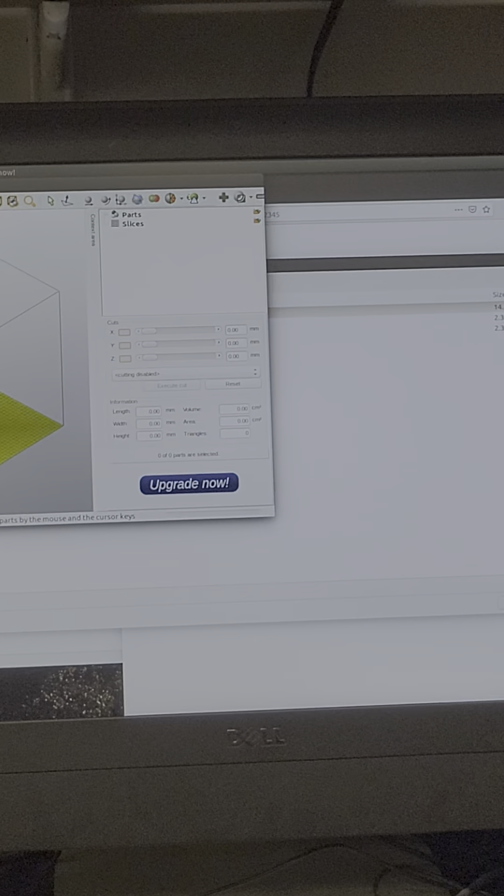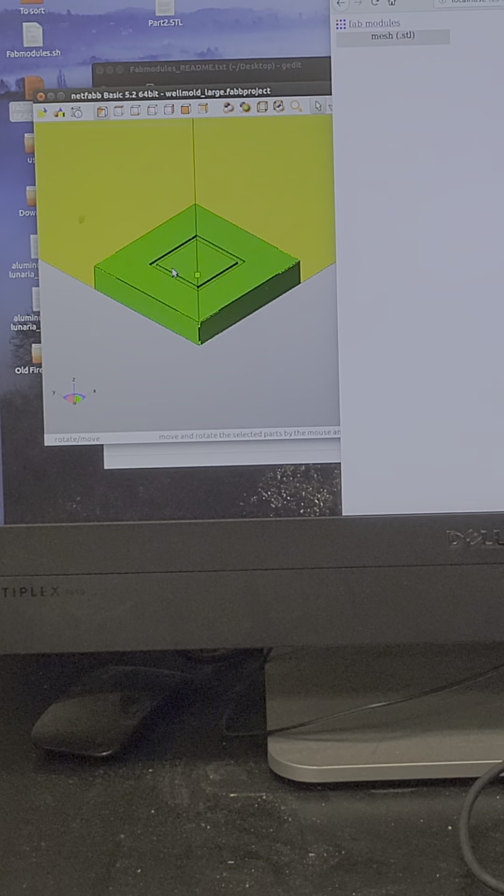Let's see if there's any software that we can look at what this guy actually looks like. So this is just a simple mold with just a square, or just a ring. But you need it to look at a file and see if there's any pattern in that file. So you need some sort of base platform for the software to read it.

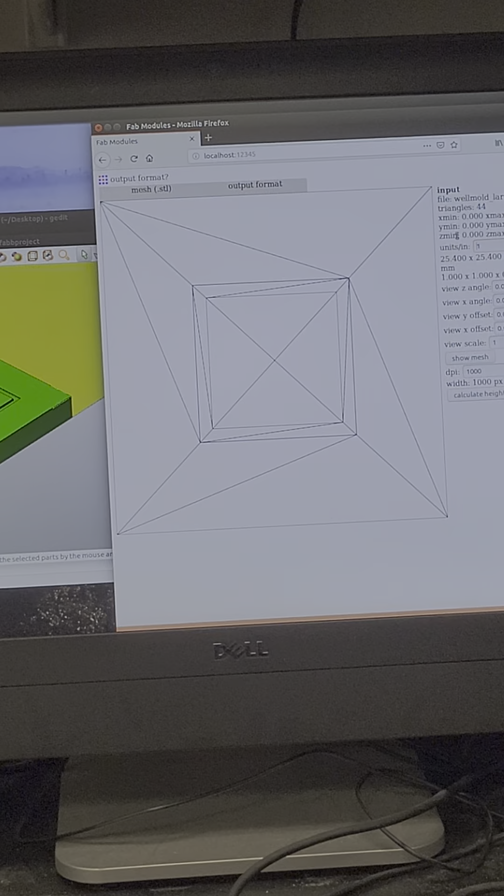So if we open that file, it's looking top down. So you have to make sure that the z-axis is pointed up on your file. Okay, so we're looking down, you can see this. And the only thing we have to change on this first section is the units per inch, depending on what units you used. I think I have millimeters, 25.4, and then you just hit calculate height map.

See it, kind of, it's yellow. Yep, yellow right there. Okay, well that's nice. So output format for this is Roland mill, the only output that will work here.

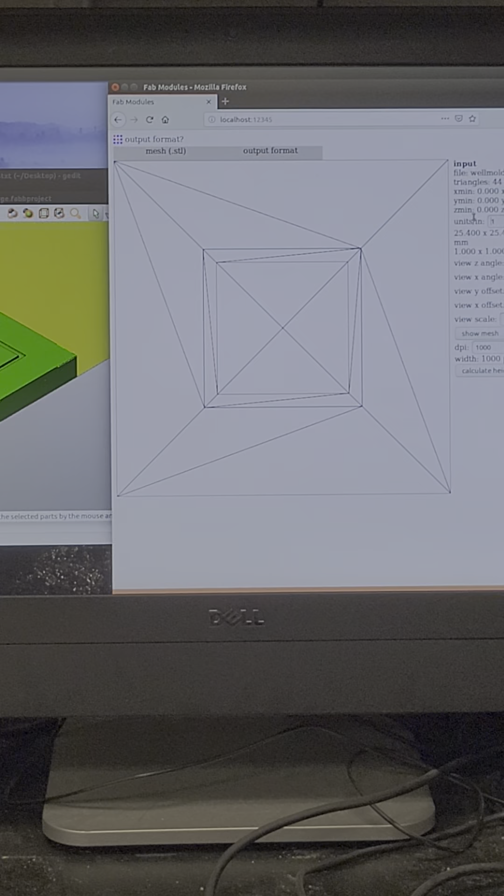Does the power need to be on or something, or? It's not happy. Okay, fun, haven't used this in a long time. So it's still connected to the computer, I assume, right? It's still connected to the computer, but the one other thing I can do, besides restarting the script, is run this command to allow you to connect to the USB, if that's the issue.

I'm just going to restart the script and see if that fixes it. So let's try this again. Mesh.

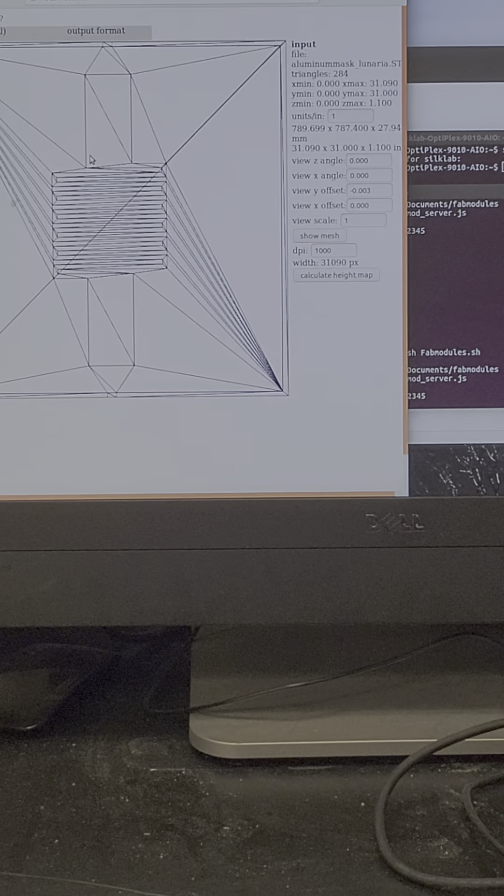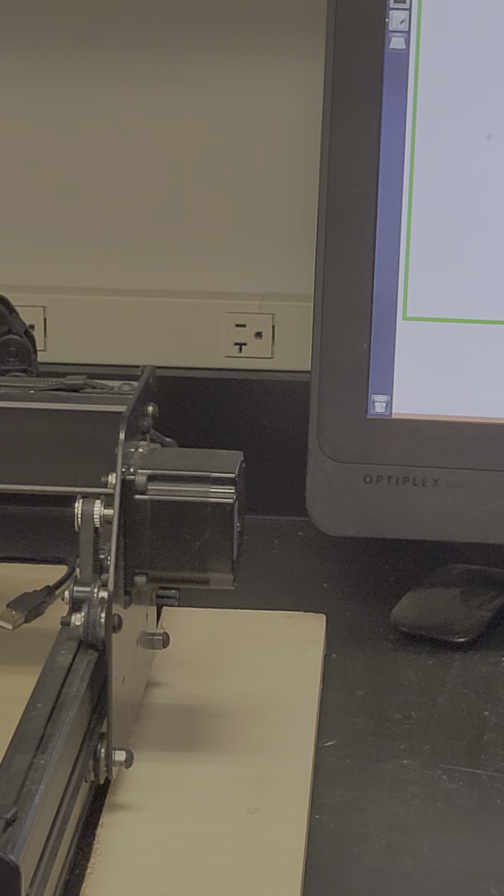Maybe there's something more interesting we can look at. Okay, this is more interesting. Same units. That's the thing that you... what's that? Oh, it's quite similar to that heater. It was meant to be a heater, yeah.

Roland mill output, machine, okay. Yay! So nice, restarted everything, ended up working. We have the MDX-15.

Now the speed is dependent on what material you're cutting. Sure. So that's all similar to any other CNC.

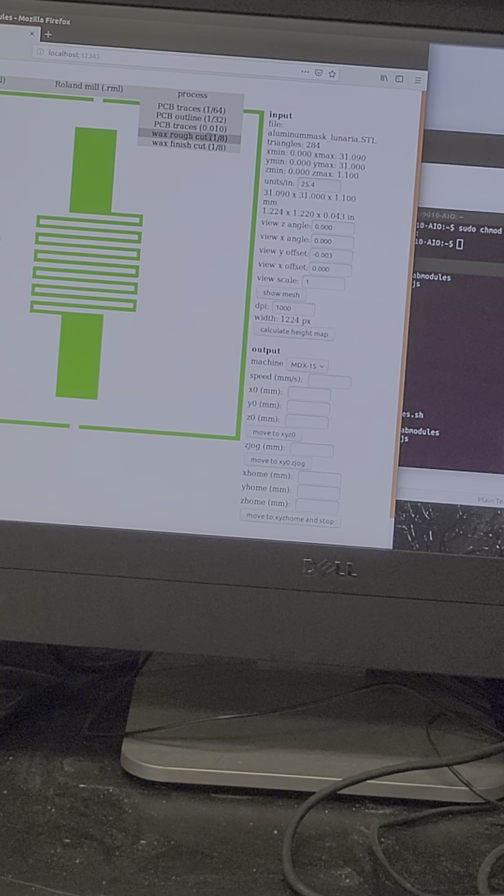Okay, I don't know why it's not working. Let's see. So the two ways this machine works is either through a rough cut or a finish cut. The rough cut is where it does individual steps in the Z-plane, and the finish cut is where it goes along the XY and steps up the Z-plane, or it travels the Z-plane through each XY line. Yeah, like a 3D print or whatever. Normally you do a rough cut and then a finish cut on the same one.

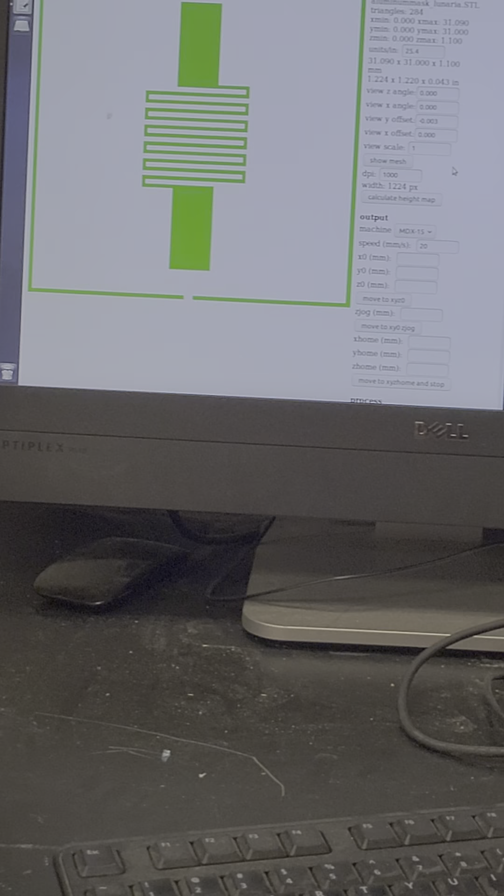And in terms of like zeroing the XYZ for this? I'll show you in a second. It's just, for some reason, it's not actually loading the command here, which means something's off. Always finicky. Right now, if I hit move to 0, it should communicate with the machine, but we're missing the send command, which likely means it's not communicating with the machine.

So what I'm going to do is, once again, restart. Let's try this again. We'll load our STL, calculate our height map, output to Roland mill, choose our machine. Ah, still not doing it.

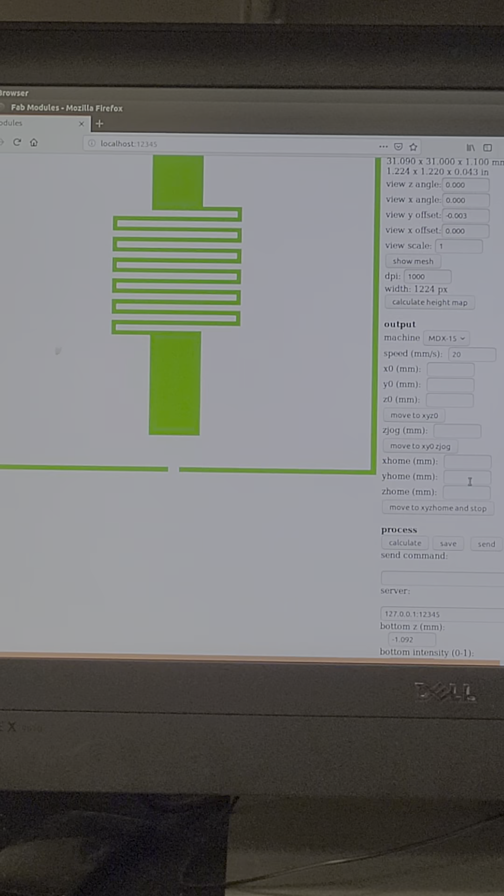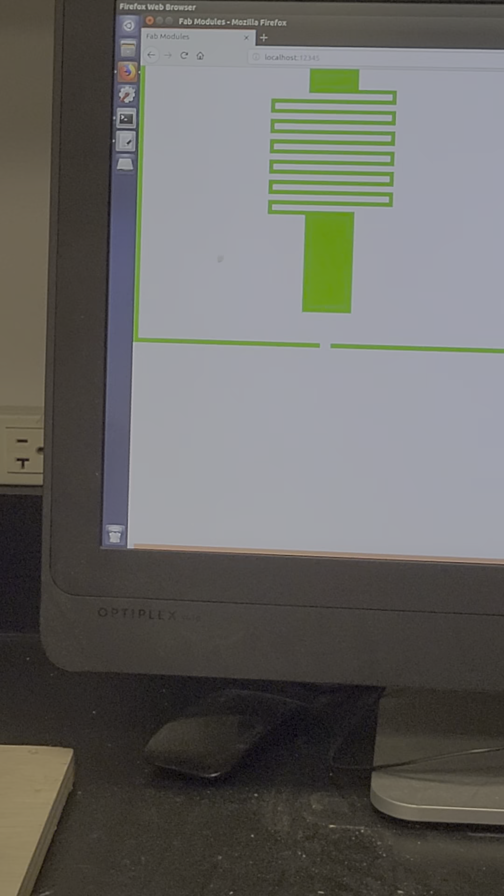Okay, so now it populated the send command, and it loaded the XYZ coordinates for 0, which is where it is now. If I... the first thing you have to do once you get to this point, once you generate your map and it seems like it's communicating with the machine, this send command is not correct.

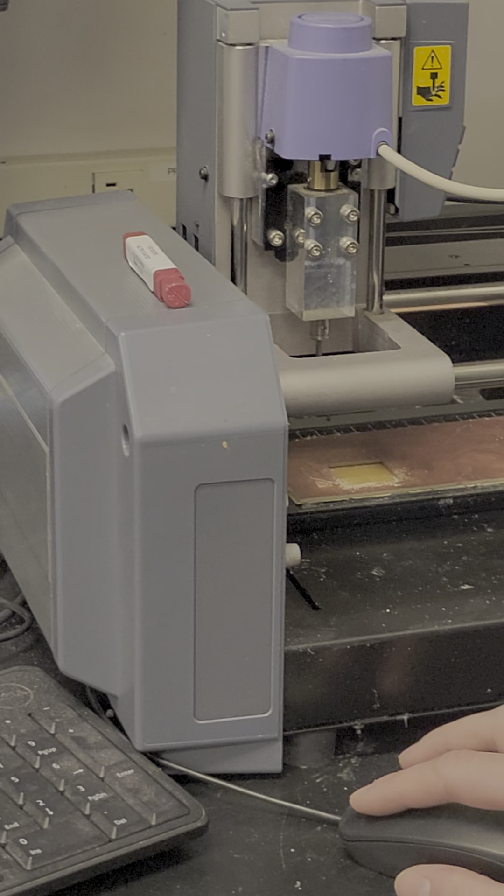So in our README over here, it says change the handshake to DSR DTR. So the handshake is that command right at the end. So I just changed that, and now that I have that, I should be able to move to 0. So this is currently the 0 point. Then you would adjust the Z-axis height. Let's see, maybe I start with some wax. You have to loosen both sides.

Nice, just watch all those saws too. Yeah, don't want you to get the undergrad treatment on your last day.

So usually what we do is you put your drill bit all the way up, adjust the Z-axis to close to what you want, and then you drop the drill bit down to the surface of your part. So let's say my part was over in the middle here, I would change my X and Y to get over there.

So let's say that was where I actually wanted to start. I would hold down the tool down button, and let's say I was close to my part here, I would drop the drill bit to rest on my part and then tighten. Then you could say that's Z 0 for now.

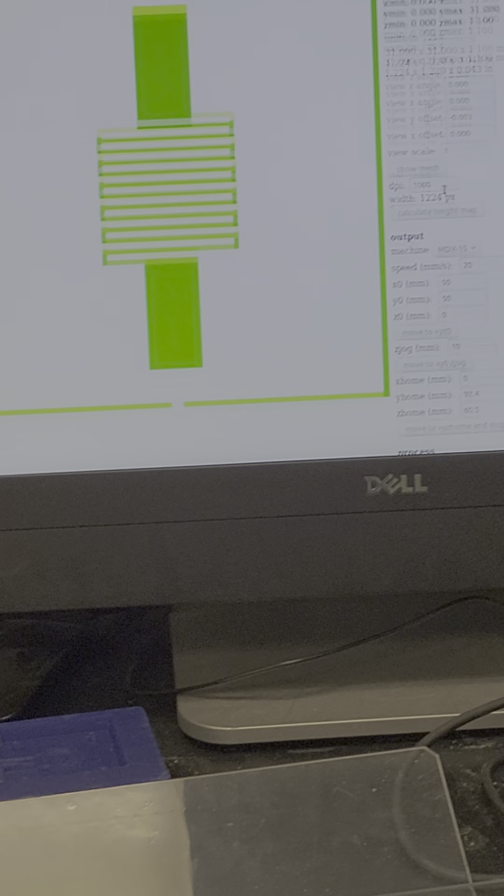I'm not sure how thick this pattern was, but let's hope it's around a few hundred microns. The tool bit is 1/32nd, but I'll just put in some number -- 1/8. Once I have all that ready, I can calculate my process, and it will calculate the path.

For large parts and small drill bits, this takes a long time.

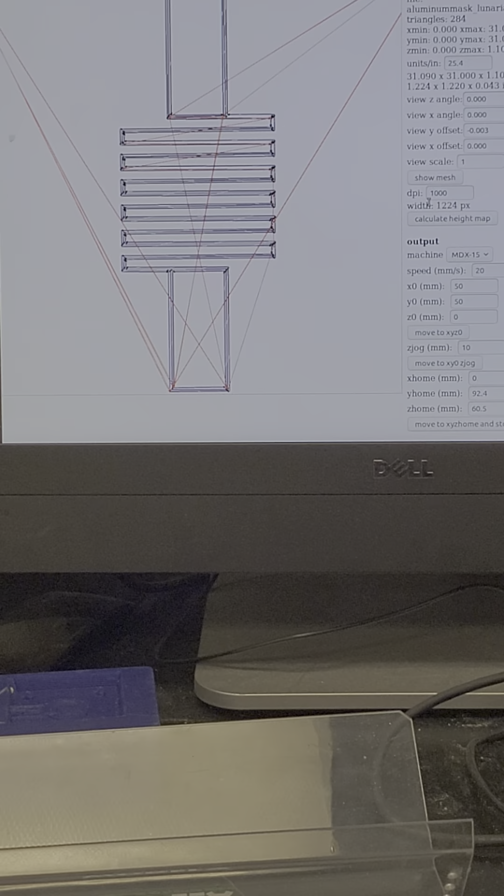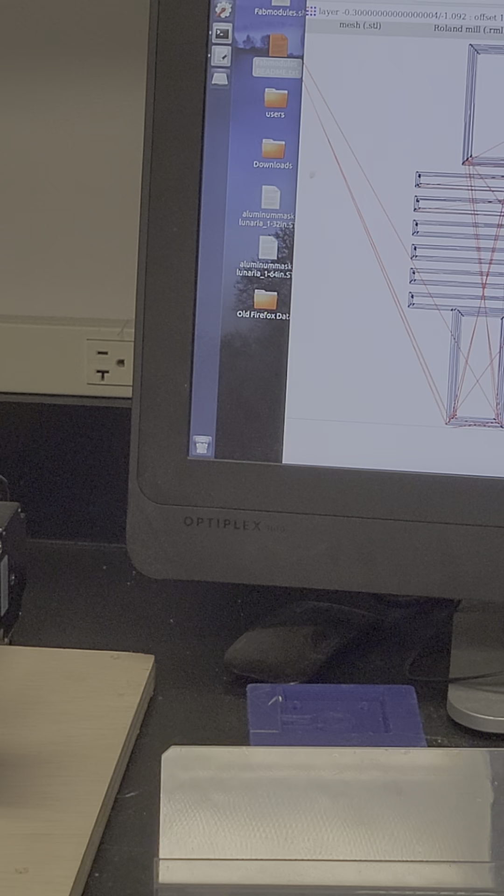Any benefit to using this versus the mill in the electronics room? For a PCB, the only reason I would use this is because the other one's broken. For a PCB, this is horrible compared to the other one, because you are stuck with one drill bit for the whole job. So it works for very simple things.

So it looks like my thing was actually 1 millimeter deep, so it's got to do 10 layers. Yeah, yeah.

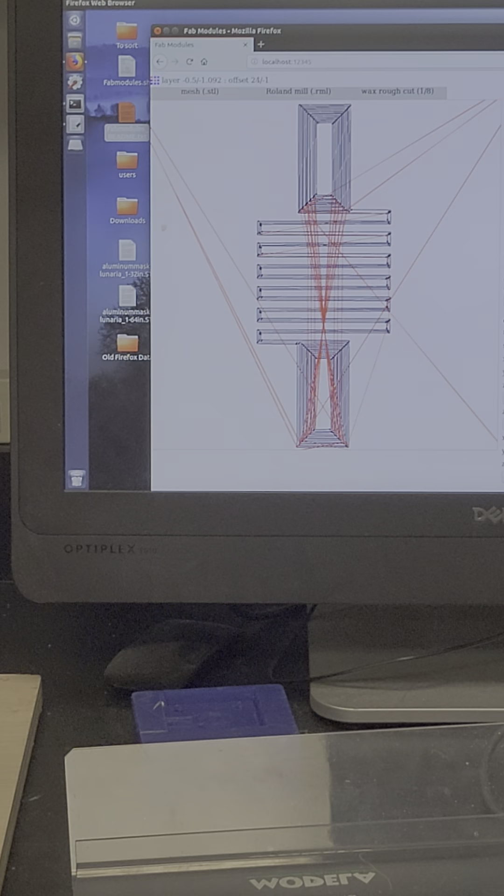All the drill bits for this guy are over here, on the bottom there. Yeah, at the bottom, all these.

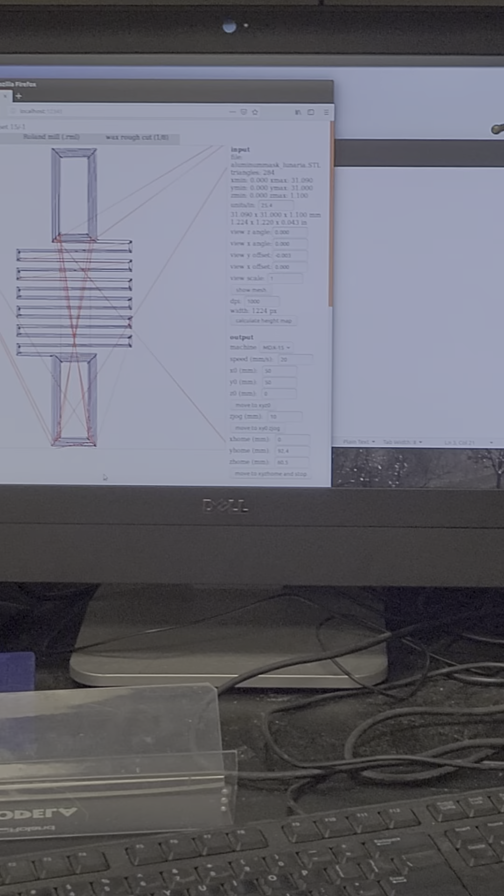Still a few more layers.

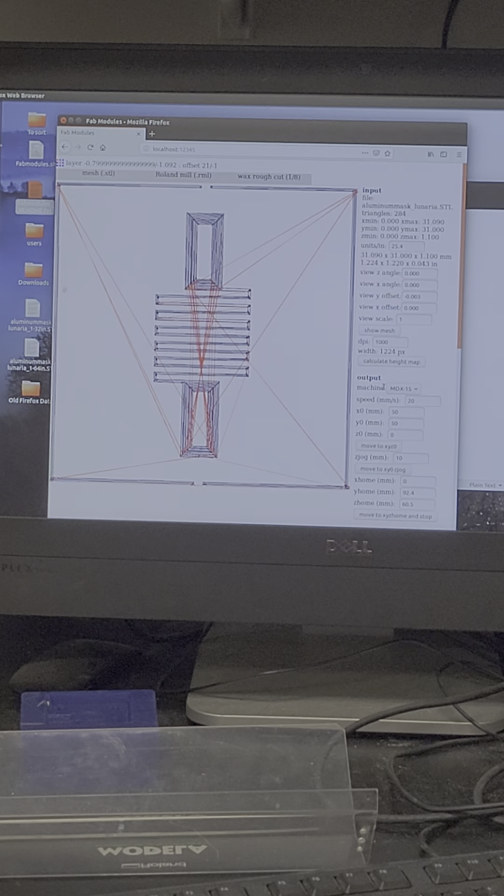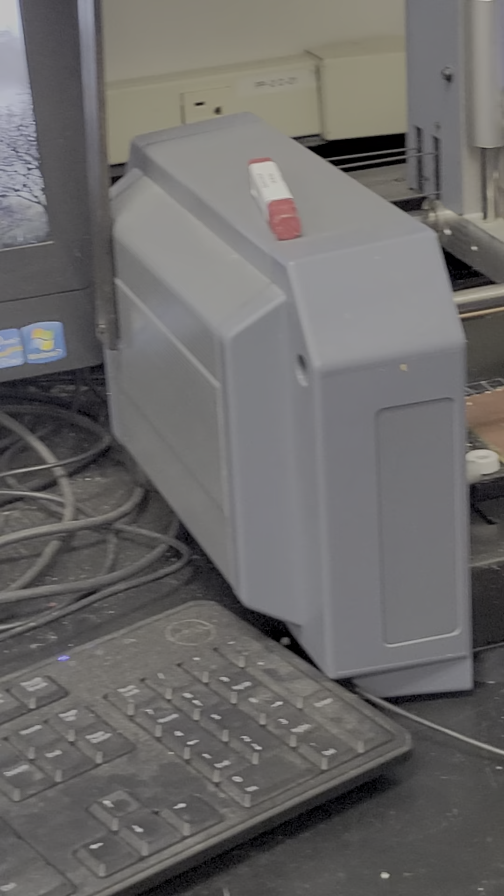So once you're done with that, all you do is hit send. And the router itself is already on now? The actual spinning bit is rotating, right? Yeah, you don't need to do anything else to turn that on. Yep, now it's just going and it'll complete this job.

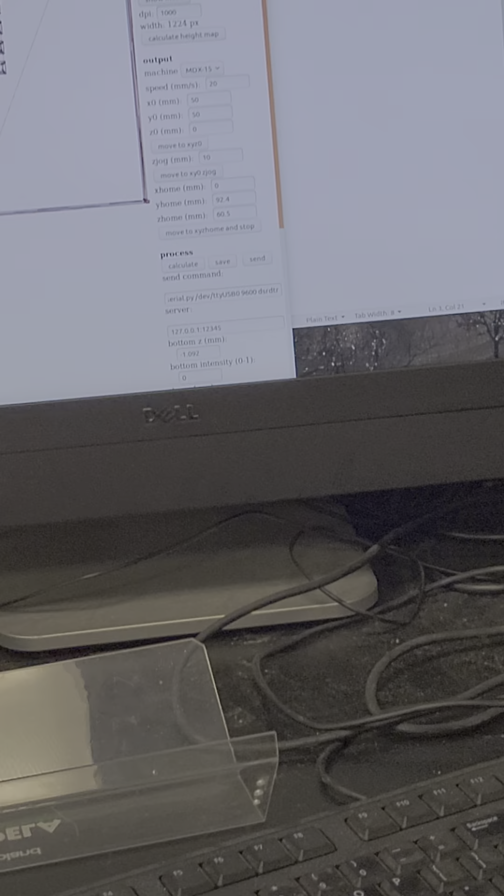It's not very smart, there's no feedback. If it's killing itself, it will destroy itself. So if you have to stop it for any reason, if it's doing something you didn't want it to do, just hit view and it'll go off into the corner. The second you hit view again, it will continue doing what it was doing. Even if you close this, there's some data that's still been sent over, so the only way to clear that is to hold both up and down, and then hit view.

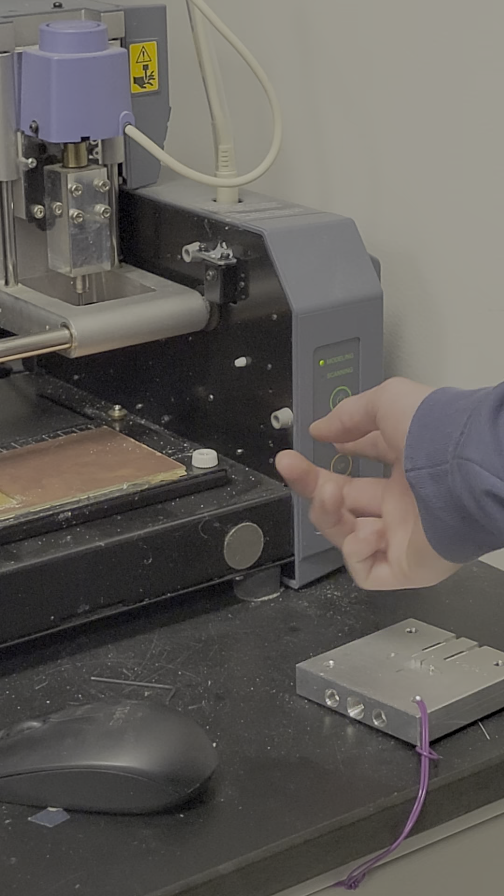Let's see if it's trying to go. First close this, okay, and then hit up down. Wait until that stops flashing, and then we can hit view, and it'll go back to the 0 point.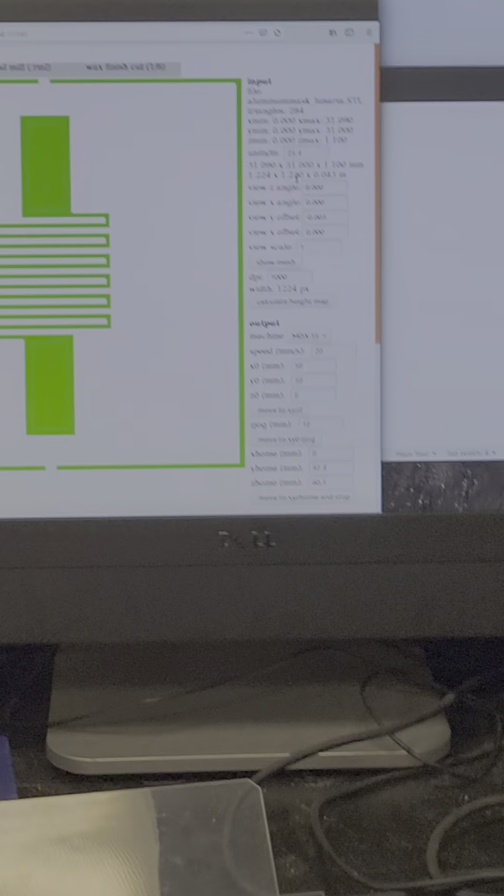And then the last step would be to run finish cut, depending on what you're doing. For this type of pattern, where it's just a 2D pattern, you wouldn't need to run a finish cut.

But so I loaded finish cut, just hit calculate. You do have to reset the tool diameter, so it looks like my large tool diameter doesn't actually do much.

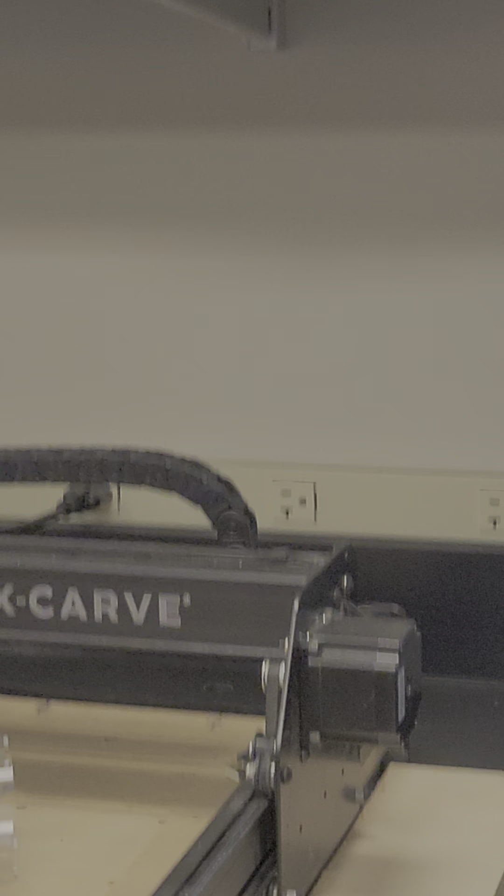In terms of part adhesion to the platform, you just use double-sided tape or something? Or hot glue. Okay, it's not like a clamping system in there. There's no clamping system. There's a pretty large amount of force from the drill bit to the part, so it really needs to be glued down or taped down. I've had an issue with the double-sided tape not being strong enough, so the Gorilla double-sided, not the standard Scotch or whatever.

This PCB is just glued down here. There's these two screws, and this is our plate, our base here. You can use a spatula to remove the old part.

And there's no vacuum or anything like this for the dust, right? Nope, that's all manual. The only reason I would use this machine over the Handibot is the accuracy -- this has 5 micron accuracy. That's the only reason; otherwise, that guy's better in basically every way.